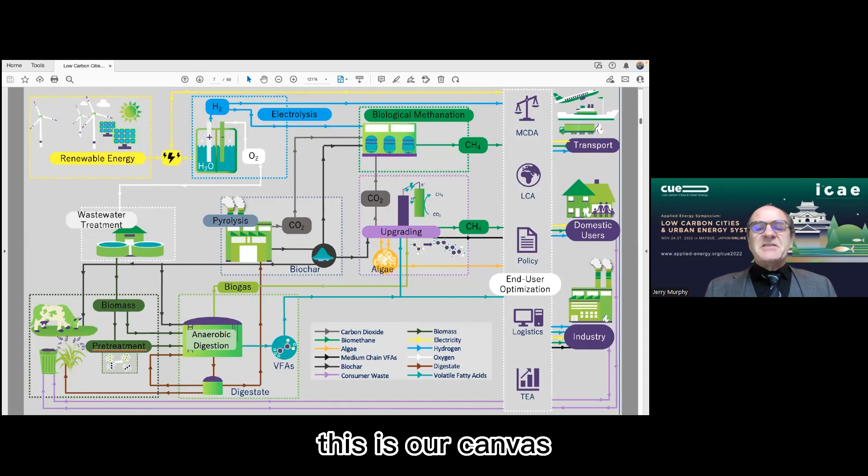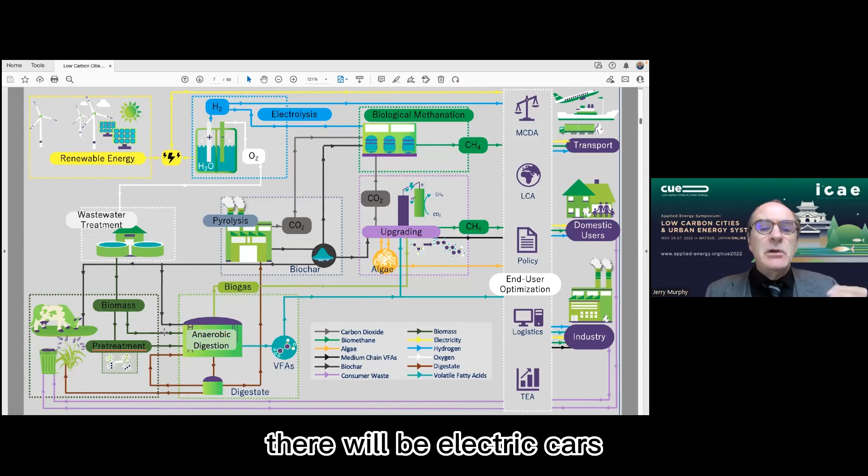It's always a collaborative process. This is our canvas, this is sort of where we take our inspiration, and there might be a lot in this, but I hope to go through the presentation and outline the areas of work that we feel are important to decarbonize society. One of the things we look at is the grand challenges of decarbonizing transport, industry, and agriculture. We take for granted that there will be electric cars, there will be renewable electricity, but we're trying to look at the difficult pieces.

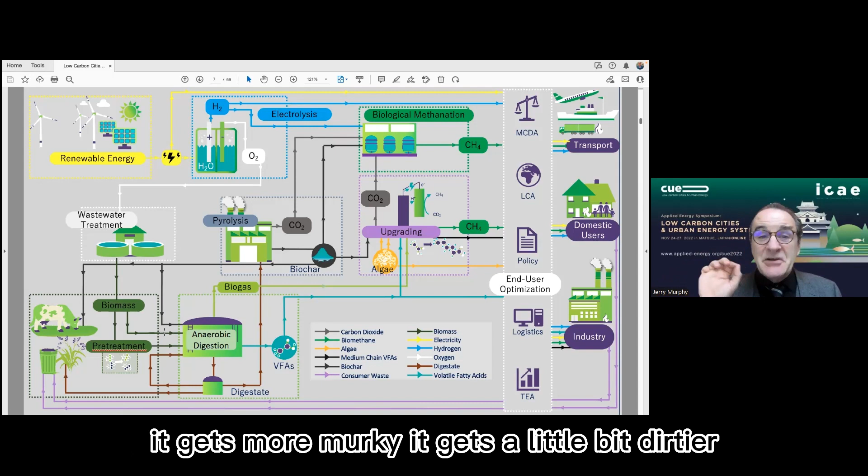A lot of what we look at is zero carbon. As an engineer, a mathematical engineer, I find zero very difficult. Whenever we look at things, we find it very, very difficult to get to zero. We can see large swathes of decarbonization, but zero always is difficult. As you get closer to zero, it gets more expensive, it gets more murky, it gets a little bit dirtier. So we look at difficult aspects of the decarbonization.

Typically we start with renewable energy, and we're very lucky in our center - we are the National Ocean Test Facility. We have 4 large wave tanks, and we can test devices at 1:10 scale, so a 1 meter wave becomes a 10 meter wave. We've tested lots of floating offshore wind devices and oscillating water columns.

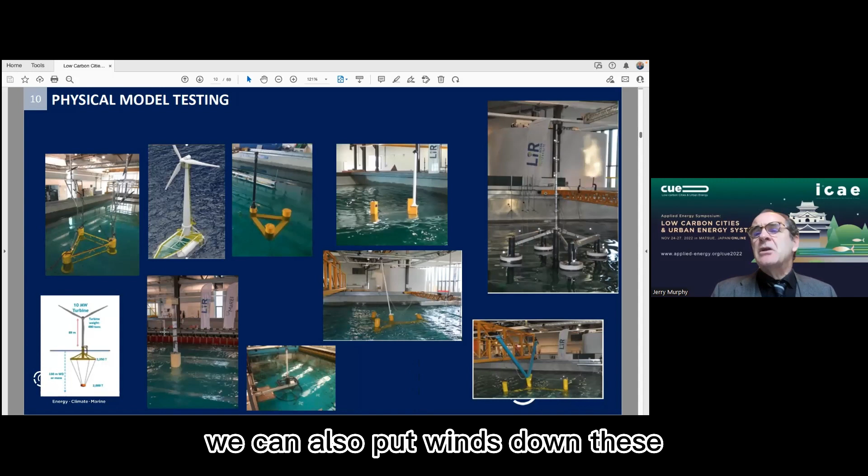We have circular tanks where waves can come in different directions, and we can measure at 1/100 of a second the movement of the devices in our facilities. So lots of different devices are tested, and it gives us lots of data. We can also put wind down these tanks to look at the effect of currents, of winds, of waves. This work is led by Jimmy Murphy, my good colleague.

So we use that data to look at how that energy is best used for society as a whole. And one of the areas, obviously, is hydrogen.

So the perspective we have is that Ireland is an island. If you're familiar with the geography, we have about 3,000 kilometers of coast. We have a population of about 6 million people. We sit off the northwest coast of Europe, with Britain between us and the mainland. But we have a huge resource of ocean. In terms of actual land under our authority, we're the biggest country in Europe. We've got this massive amount of ocean that is in our area.

The perspective we have is that we will keep building offshore wind until we satisfy electrical demand at the lowest level of capacity factor. For example, if Ireland has a requirement for 8 gigawatts of electricity, and we build 60 gigawatts, that will at all times cover the requirement for the country, even when it's not that windy. The idea is that the rest of the electricity could be converted to hydrogen. So we're looking at a hybrid model. Initially, we manage electricity, but afterwards we look at other things.

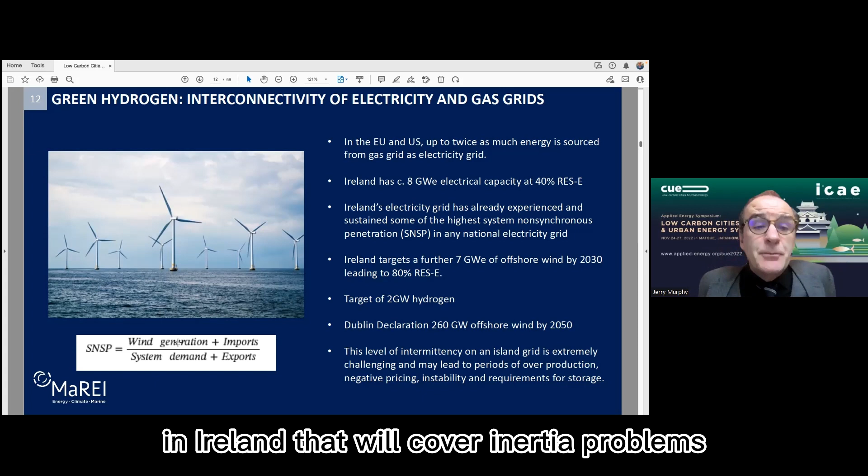Ireland has about 8 gigawatts of electrical capacity at the moment, and 40% of our electricity is covered by wind. An issue for Ireland is we are an island, so we have an islanded grid, not well connected with other countries. We've experienced the highest levels of system non-synchronous penetration of any electrical grid, going to 75%, meaning at any one time 75% of electricity is coming from a variable renewable source, which is wind generation. We've just spent 150 million on a flywheel in Ireland that will cover inertia problems. I'm not an electrical engineer, but full electrification is very, very challenging.

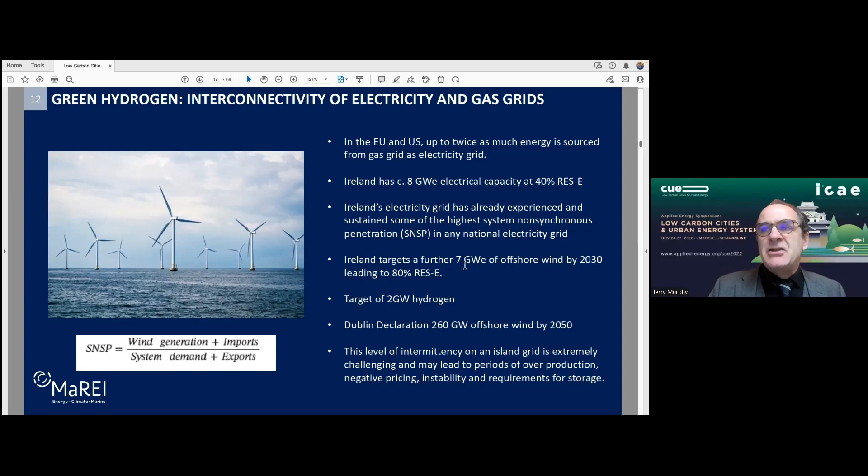Ireland has a target of 7 gigawatts of offshore wind by 2030, and a target of 2 gigawatts of hydrogen. We've signed the Dublin Declaration with our neighbours that in the northern seas of Europe there'll be 260 gigawatts of offshore wind. This is quite challenging. One reason is we've just signed a contract with France for a 700 megawatt HVDC cable to have some connection with France, at about €1 billion. So we're looking at very large HVDC cables coming ashore, and my understanding is the maximum size is 1 gigawatt. So we have a very challenging logistical problem in managing offshore wind to the level that we want.

If we look at curtailment and constraint, Ireland is an island, and we have about 5.5 gigawatts of wind, corresponding to 12% dispatch down. So we have to spill electricity either due to constraint or curtailment. Not all our electricity is actually used, because it's produced when, for example, on a summer night we're all in bed, it's windy, there's loads of electricity, and we don't use it.

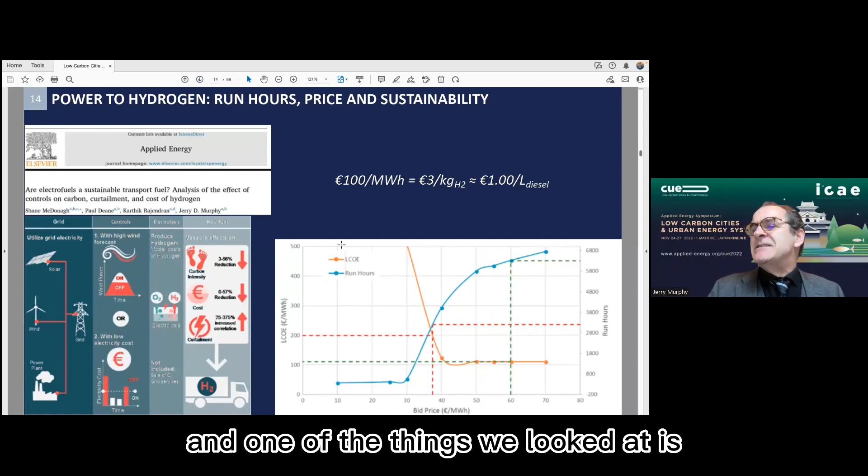So we've started looking at hydrogen as a way of capturing that electricity that isn't used. One of the things we looked at is if we had electrolyzers just for the curtailed electricity, just for 2 or 3 hours at nighttime. What would happen is we'd be running, if you follow the red line, about 3,000 hours a year.

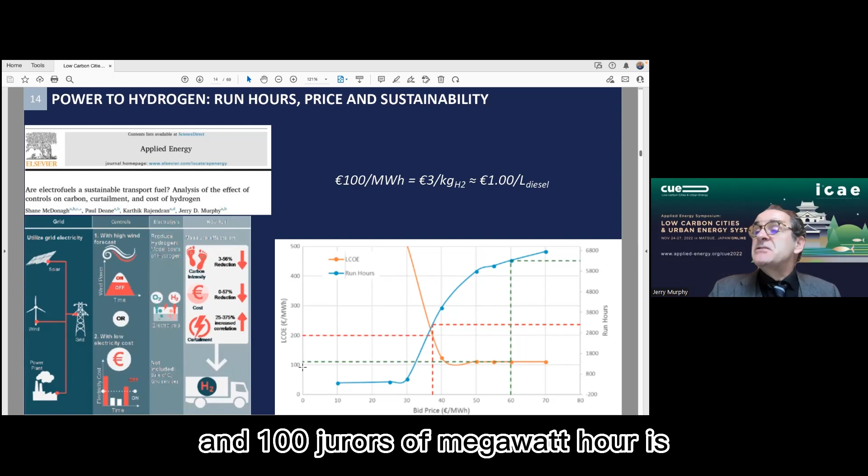The bid price would be about 4 cents a kilowatt hour, but the levelized cost of energy would be €200 a megawatt hour. However, if we ran for 6,000 hours a year, that would correspond to a bid price of about 6 cents a kilowatt hour, and our levelized cost of energy would be €100 a megawatt hour. So we need to sweat the assets. If we buy electrolyzers, they can't hang around for a few hours when we're curtailing electricity, they need to be operating a lot of the time. And €100 a megawatt hour is €3 a kilogram of hydrogen, about €1 per litre of diesel displaced.

So we're looking at this idea of offshore wind farms. Should they produce electricity? Should they produce hydrogen, or both? One of our papers looked at this: we would sell electricity until the demand fell. And when demand falls, we're satisfying the country's electrical demand and electricity becomes cheap. So through a model, we found roughly 4 cents a kilowatt hour is the crossover.

So we now produce hydrogen, and that would give a levelized cost of hydrogen of €3.77 a kilogram, which is 11 cents a kilowatt hour. So if we have electricity at 4 cents a kilowatt hour, we produce hydrogen at 11 cents a kilowatt hour.

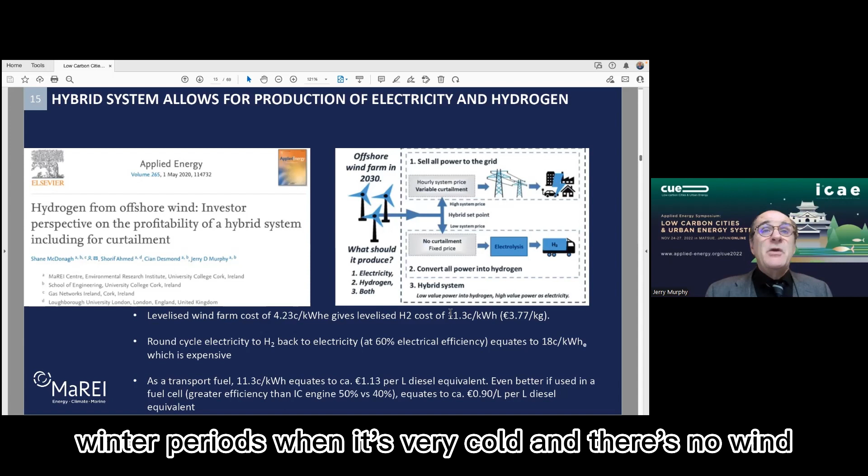There are conversations about storing hydrogen for 20 days underground so that we can manage those winter periods when it's very cold and there's no wind. But if we go from hydrogen back to electricity at 60% electrical efficiency, that's 18 cents a kilowatt hour. So there is a challenge: electricity produced at 4 cents a kilowatt hour, when you go to hydrogen and back to electricity, will be 18 cents a kilowatt hour. And that's the base cost - there'll be more transmission costs on top of that.

However, our utilities are looking at hydrogen as a means of dealing with peak electricity. However, if we look at transport fuel, that hydrogen at 11 cents a kilowatt hour is €1.13 per litre of diesel equivalent. And furthermore, if we put it into a fuel cell, which is higher efficiency than an internal combustion engine, it's about 90 cents per litre of diesel equivalent.

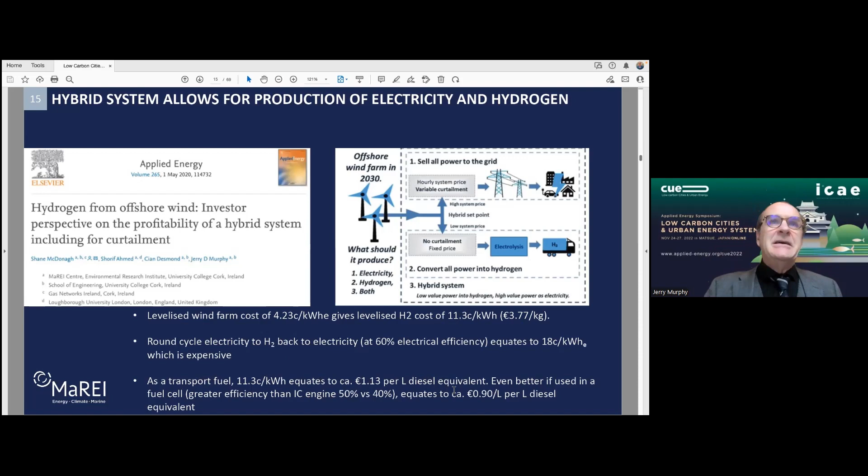So our perspective is hydrogen from offshore wind is very, very viable for transport. We've also looked at where do we put these electrolyzers. Are they on land? Are they on sea? Are they on every wind turbine? Is there a platform where the turbines connect to?

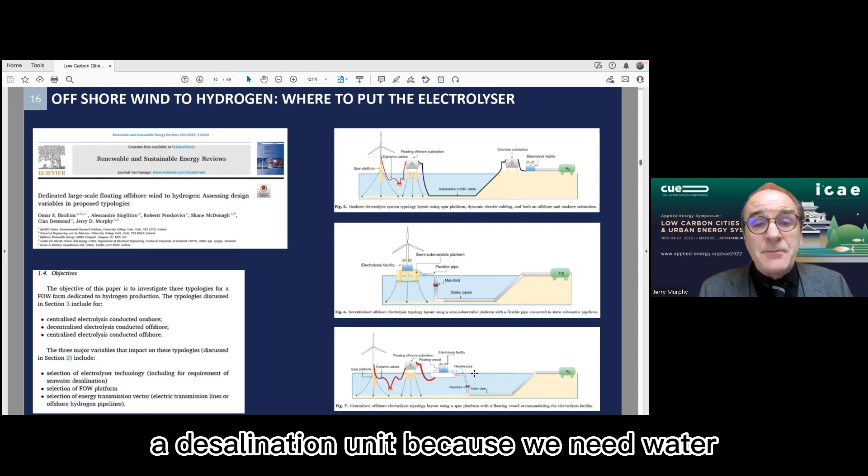We're looking at brine discharge, which brings in the whole area of the habitat and what will happen. But the joy of producing hydrogen offshore is that you can get a lot of power through a hydrogen pipe, where the HVDC cable is really limited to a gigawatt. So there are advantages and disadvantages of where the hydrogen is made.

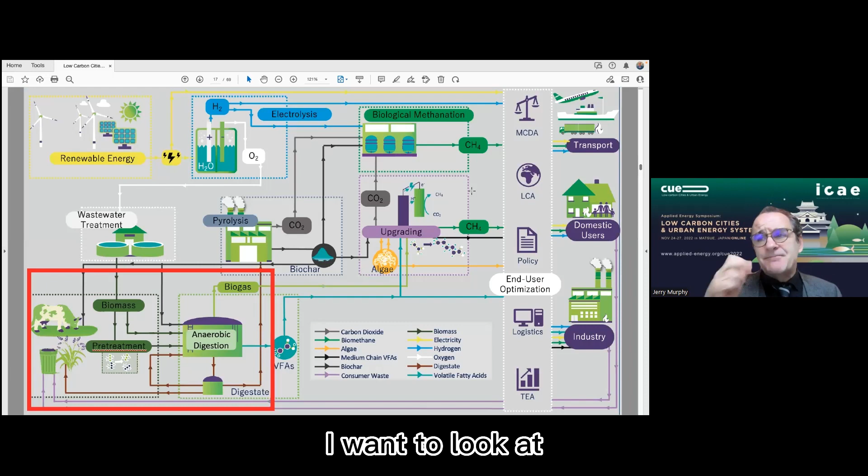I want to look at anaerobic digestion because this is very much part of the circular economy system. I served for 6 years as the leader of the International Energy Agency TCP in bioenergy, and we produced 14 or 15 reports and 20 or 30 case stories. But anaerobic digestion, in my perspective, is the epitome of the circular economy system.

It deals with food waste, with slurries. It can produce a transport fuel, combined heat and power. It reduces fugitive emissions from open slurry tanks.

For example, we looked at an organic farm in Denmark. When you go organic, you've no chemical fertilizer, no weed killer, and the yields of your crops decrease. So the biogas plant was built as a means of having an organic biofertilizer. All of their dung went to the digester, it was liquefied, and the minerals were far more available. So we made a fertilizer from dung that was better than dung. The yields went back up, and now the milk is assessed as greenhouse gas negative.

So again, we would see anaerobic digestion being essential for organic farms. One of our partners in Brazil had 400 hectares of grassland, and it was a nuisance what to do with the grass. Finally, they're now running 60 cars off that parkland grass.

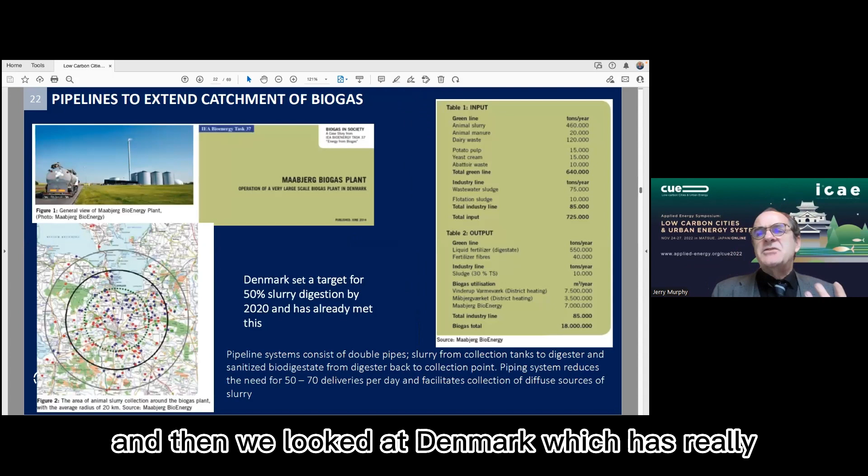And then we looked at Denmark, which has really gone for scale. One of the things they did in Denmark is back in 2010, they told farmers by 2020 you can't spread slurry on the land raw. They had problems with eutrophication, and problems with wells. So the government funded the farmers to have 6 months storage, and the farmers co-opted - very, very large digesters with a catchment of up to 20 kilometers.

So a farmer can take his or her dung to a pit, it's augured to the digester, which has an anchor tenant - this could be the food waste from a city, or the byproducts of a dairy industry. So all of these facilities happen at the digester, and then the digestate is augured back out to the farmer who's got a biofertilizer.

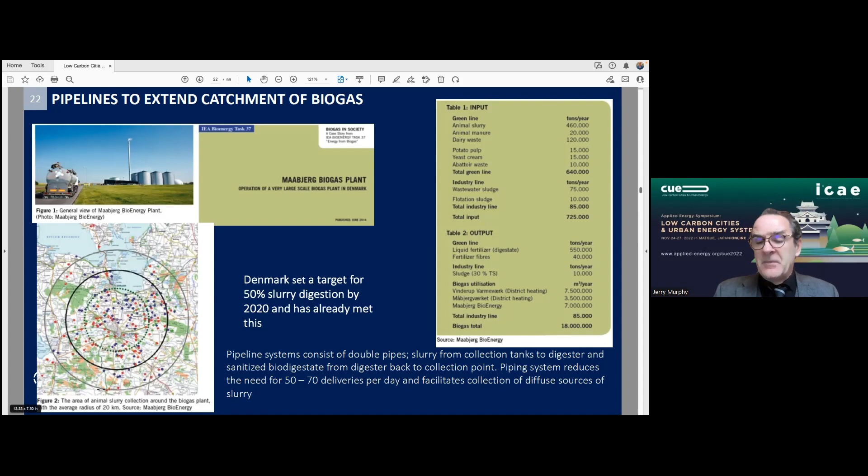We're also looking at multiple products from a digester. In Denmark, there is one biogas facility that puts methane into the gas grid, and the CO2 is scrubbed to be food scale or food level CO2. The demand for CO2 in hospitals, laboratories, and the food industry in Denmark is 65,000 tons, and a quarter of this is met by one large digester. So again, we have products such as CO2, biofertilizer, and biogas.

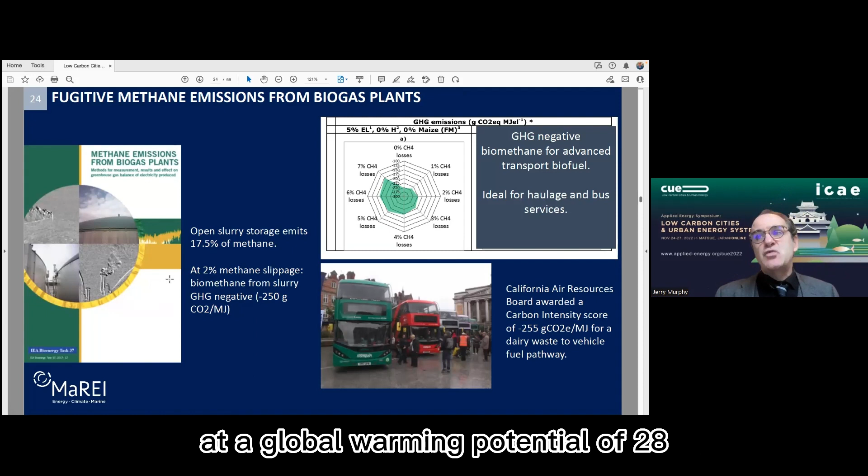What's quite important is that the open slurry tanks we have all over our countries emit methane to the atmosphere. If you have an open slurry tank, typically 17.5% goes up to the atmosphere at a global warming potential of 28. If you cover that tank and make it an anaerobic digester, you can limit slippage to 2%. In our report, we looked at 2% losses on a whole life cycle basis, and we'd be at minus 250 grams CO2 per megajoule. This corresponds with the California Air Resources Board, who awarded a carbon intensity of minus 255 grams CO2 per megajoule. So covering slurry pits and using the captured methane to power buses, which emit CO2 at 28 times lower global warming potential than methane, is a good thing. So we're in this circular economy, energy, environmental type system.

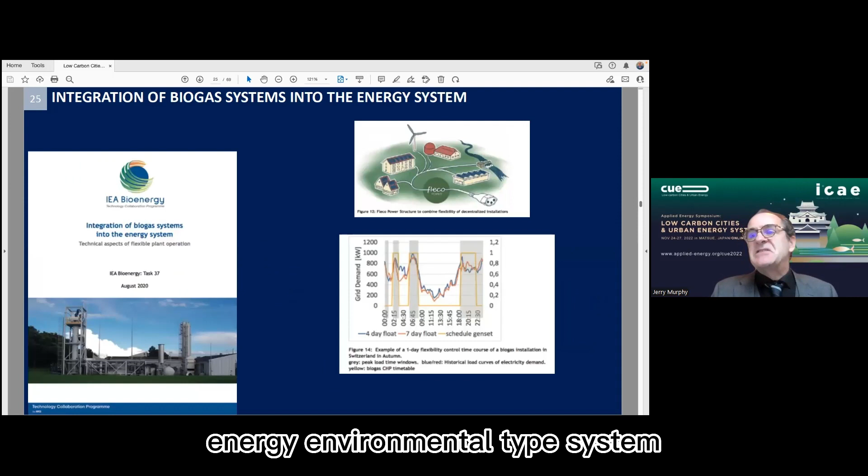We also looked at biogas as a means of working in a co-op. In Switzerland, a co-op has a hydroelectric scheme, a wind turbine, and biogas, and they sell electricity as a unit. The biogas allows them to be flexible. By night, they use biogas. When the wind isn't blowing, they use biogas. So biogas allows them to match the profile of how they sell their electricity in the market.

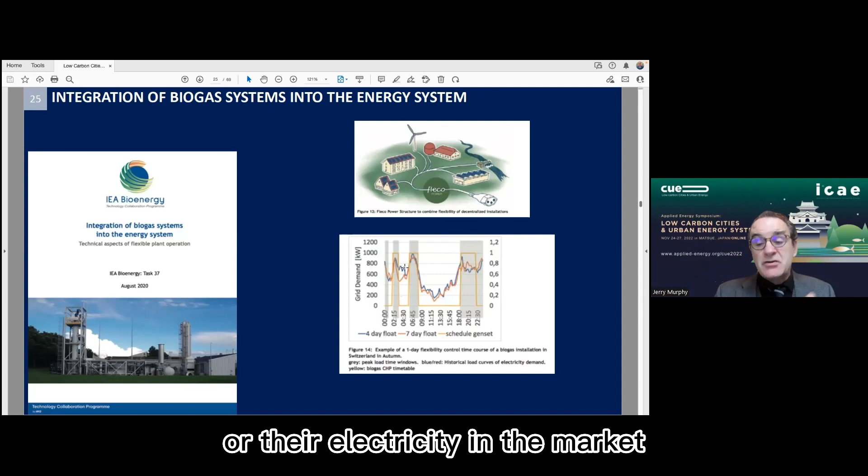I now want to move up to biological methanation. We've looked at hydrogen, and one of the things we're very interested in is power to X. We're interested in the hydrogen molecule rather than hydrogen gas, which is very voluminous. We want to look at pathways to go from hydrogen to methane to methanol to Fischer-Tropsch diesel. So we do see hydrogen as being a very important molecule, and one of the first steps is to methane.

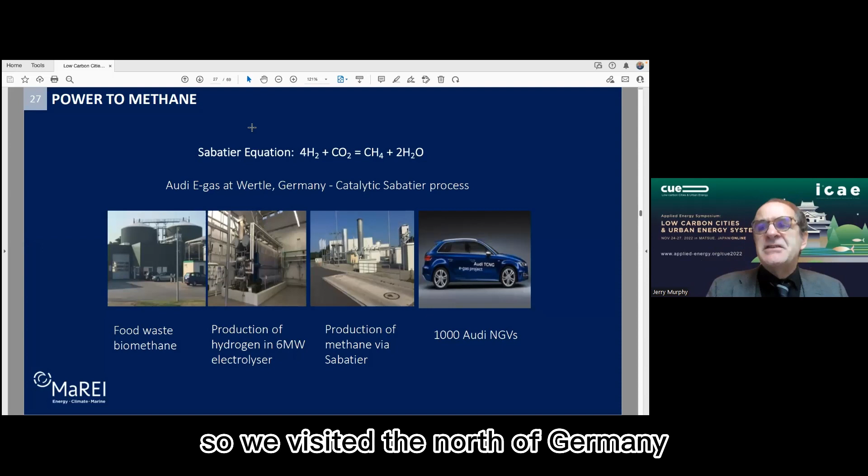We visited the north of Germany, Wertle, where Audi built a facility next to an anaerobic digester treating food waste. The methane goes to the gas grid and the CO2 is left behind, so we can capture that CO2. They built an electrolyzer of 6 megawatts, and they tell us they don't pay for electricity. When there is too much electricity, rather than asking a producer to go offline, they spill the electricity to this electrolyzer. The hydrogen is reacted with the carbon dioxide from the food waste to make synthetic methane - the Sabatier equation: 4 moles of hydrogen plus 1 mole of CO2 gives methane and water. So hydrogen from wind is reacted with CO2, a byproduct from the digester, to make methane, which is used to power 1,000 Audi natural gas vehicles.

It's a catalytic process. It operates at around 400 degrees Celsius, and there's a certain sensitivity.

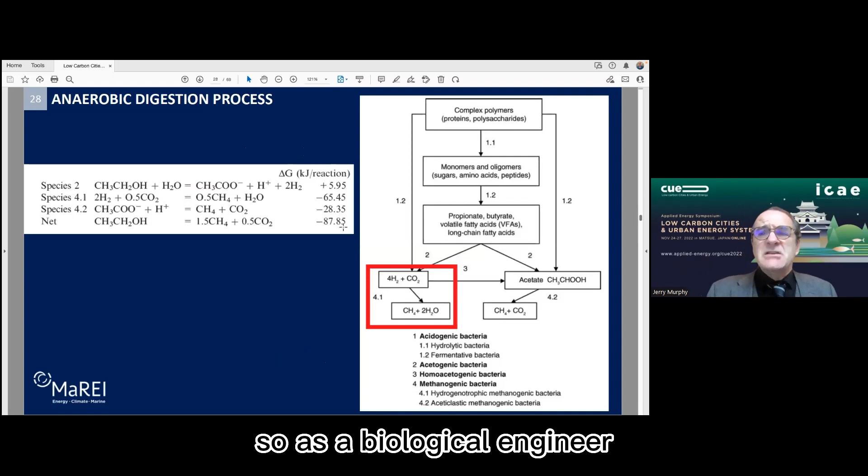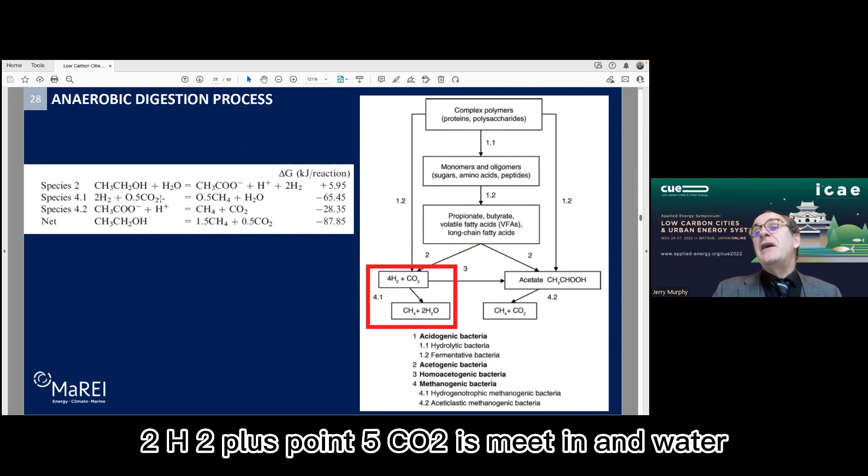As a biological engineer, we started looking at anaerobic digestion, which has complex polymers that are hydrolyzed to monomers, which are fermented to acids, which are then brought down to acetogenic bacteria that produce hydrogen and CO2. Then we have methanogenic archaea - 4.1 uses hydrogen and carbon dioxide to make methane and water. So we can see 2H2 plus 0.5 CO2 gives methane and water, and it's a very exothermic reaction. It's a lovely reaction. It will happen.

So rather than having a catalytic process, we could have a biological process. We added hydrogen and carbon dioxide to a batch of anaerobic broth and fed it over time, and all they got was hydrogen and carbon dioxide - no food, no substrates. We found Methanothermobacter wolfeii became dominant, and the reaction here is 4H2 plus CO2 gives methane and water. Performance was up about 95%, and we looked at mesophilic and thermophilic conditions, but it worked, and it worked quite readily. So then we started doing more things.

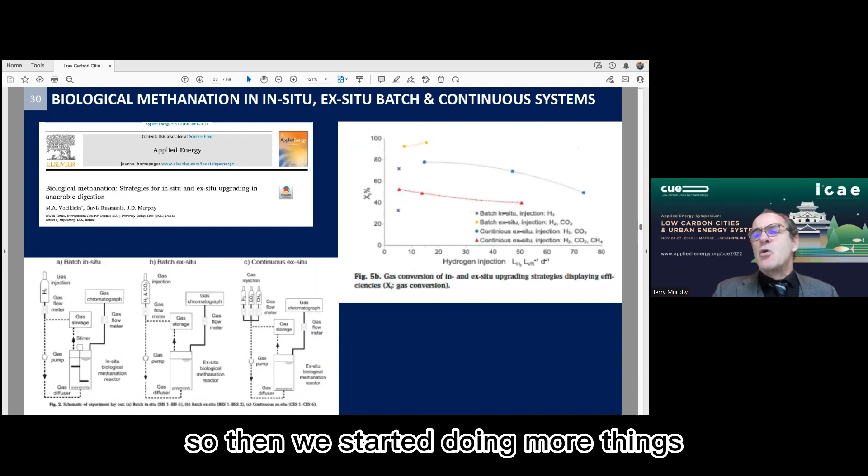We built a reactor and started operating it in different ways. First, we looked at in situ - if you put hydrogen into an anaerobic reactor, you're still going to have CO2, so that wasn't very successful; we were getting maybe 70% methane. We then looked at ex situ, where there's nothing else happening - we're only feeding hydrogen and carbon dioxide to the bugs - and we found we were up at 95%. Then we looked at a continuous process, a continuous ex situ system, where we're getting 80% efficiency.

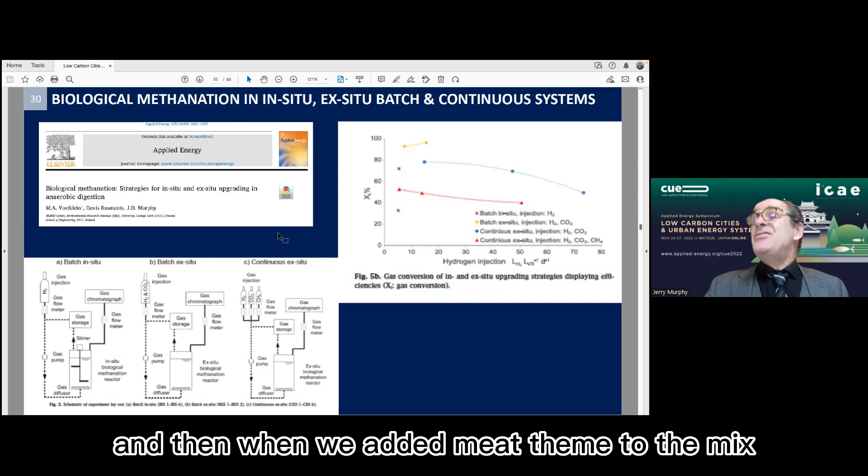But as the rate went up, it dropped off. And when we added methane to the mix, rather than just hydrogen and carbon dioxide, if we had hydrogen, carbon dioxide, and methane, the efficiency was lower because the partial pressures were upset.

So we came up with this idea of a sequencing bed system. Hydrogen and carbon dioxide or methane goes into a reactor. The hydrogen is recirculated because it doesn't go into solution readily. And then it goes to a second reactor, and then a third reactor.

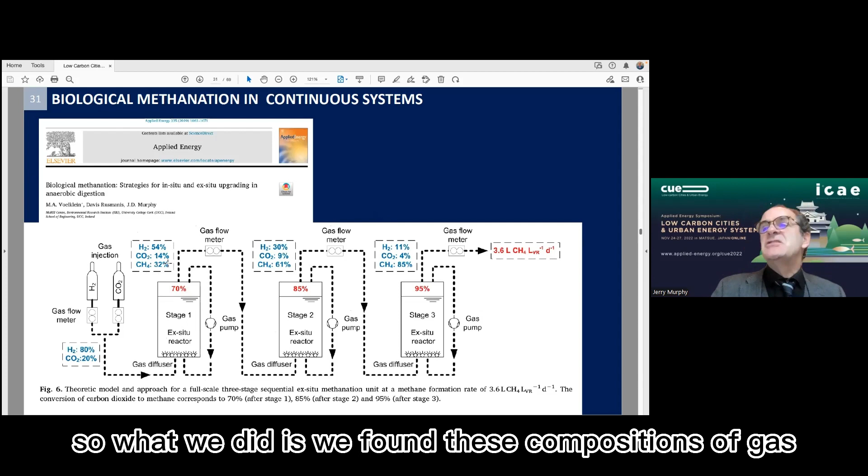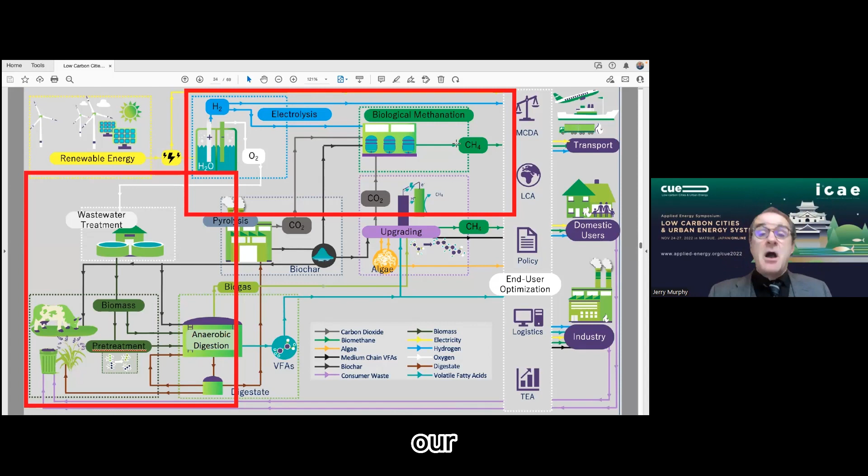So now we're looking at, we've looked at hydrogen from offshore wind, and we can convert it to methane biologically, or the Sabatier process as used by Audi. But we wanted to tie it together with anaerobic digestion. So we visited a facility in Denmark, and we published this within the IEA Bioenergy.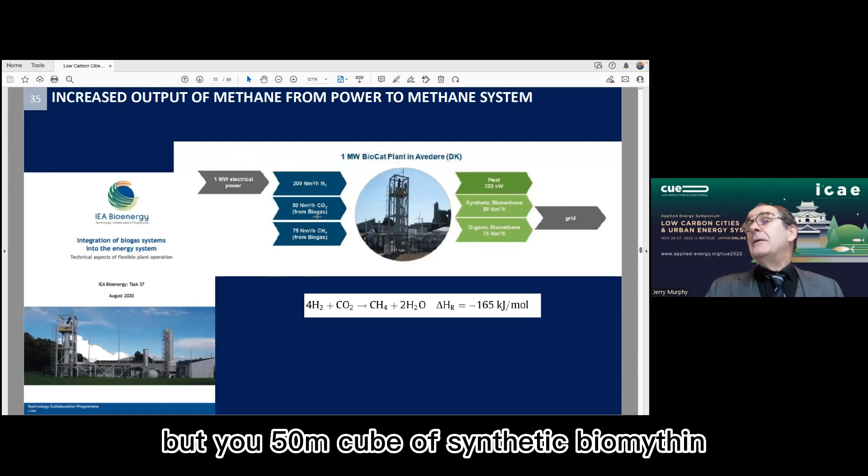They put an electrolyzer in a wastewater treatment plant. There was already a digester there, getting 125 meters cubed of biogas, of which 50 was CO2. At this biocat process, they added 4 times the CO2 as hydrogen, 200 meters cubed of hydrogen, which required a megawatt of electrical power, but all that CO2 became methane. So you now have your 75 meters cubed of biomethane, but you also have 50 meters cubed of synthetic biomethane.

And what this has done is upgraded the biogas. So we're replacing traditional biogas upgrading with an electrolyzer. We're passing methane, carbon dioxide, and hydrogen through a system, and out the other side we're getting methane and only methane. So we've increased our output by about 67%. So this is working.

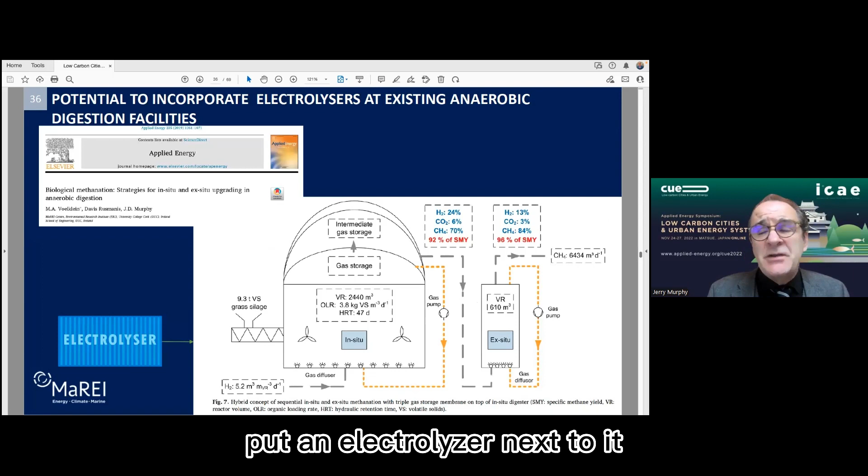We then looked at the fact that there are 12,000 anaerobic digesters in Germany alone. If every anaerobic digester put an electrolyzer next to it and had an ex situ biomethanation system, we could increase the output of all those digesters by 67%.

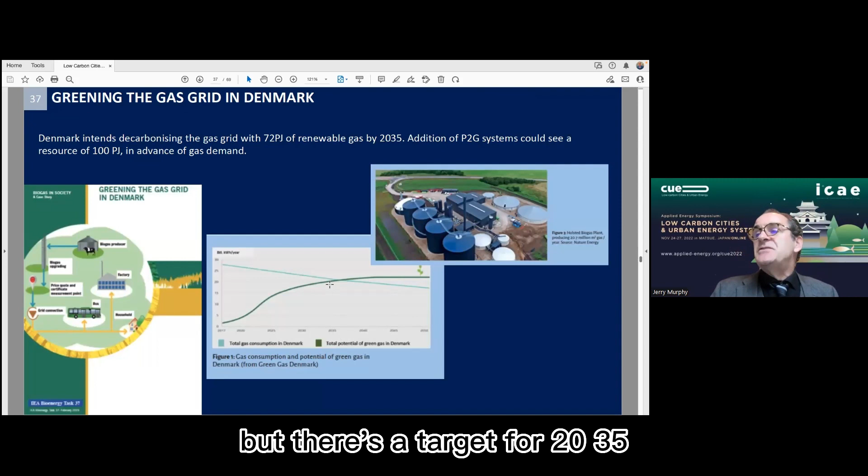In Denmark, at the moment, they have very large anaerobic digesters, and we work a little with Nature Energy, Ole Helvepund. In Denmark, currently 25% of natural gas is coming from biomethane on average over the year. In the summer they probably have a lot more, in the winter somewhat less. But there's a target for 2035 to replace all natural gas with biomethane.

And what would help in this is placing electrolyzers and ex situ biomethanation at every anaerobic digestion system, so they can access a very large resource. So it's viable, combining anaerobic digestion with power-to-X, that we can replace natural gas in the gas grid.

We looked at a situation in Ireland. I live in a city, Cork, and planning can be quite difficult. We have a wastewater treatment plant for 426,000 PE. So we thought, how about putting the electrolyzer at the wastewater treatment plant, where there won't be many issues, we hope, because very few people go to the wastewater treatment plant.

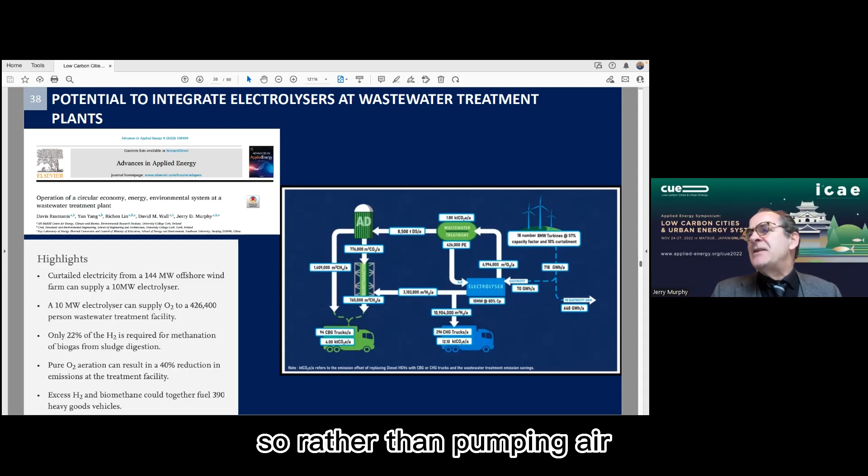And we looked at supplying the oxygen demand. So rather than pumping air, we would pump oxygen, and the oxygen would come from the electrolyzer, which in essence is reducing the pumping by a factor of 5. So we're decarbonizing the wastewater treatment plant.

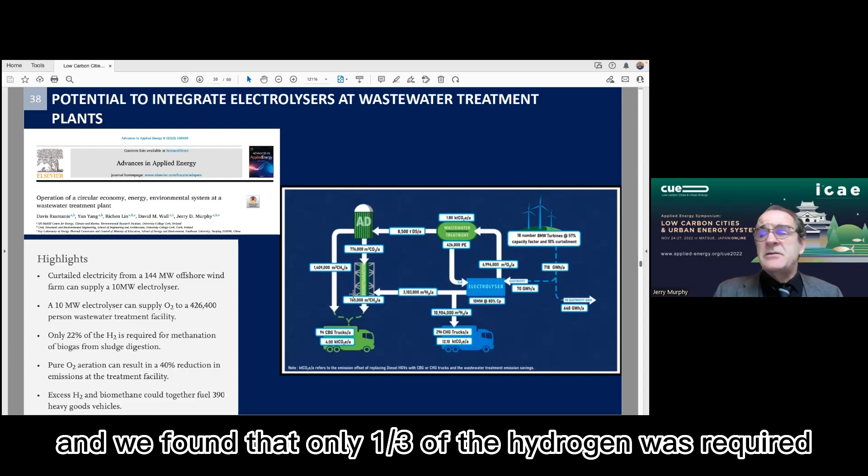So we published this in Advances in Applied Energy, and we found we could power 400 heavy goods vehicles, decarbonize the wastewater treatment plant, and capture the curtailed electricity from 18 8-megawatt turbines. So it was a nice bespoke application for our own city.

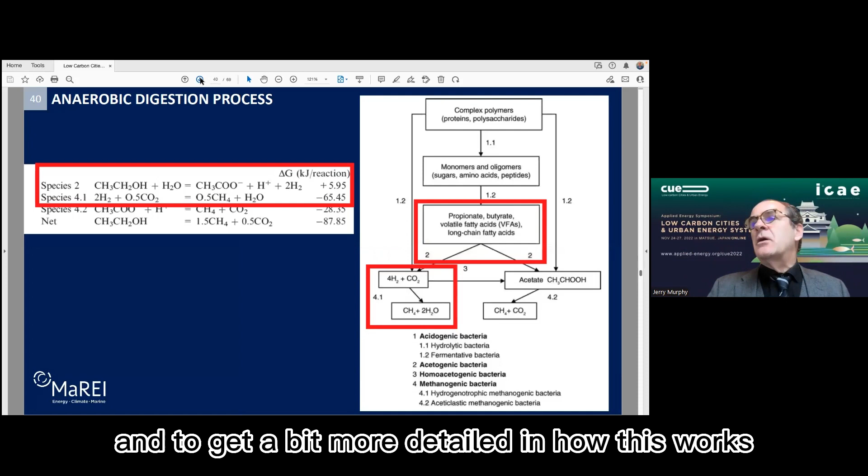We then wanted to look back at anaerobic digestion and get a bit more detailed in how this works. So again, if we look at the flow chart, one of the things in the anaerobic digestion process is that the acetogenic bacteria, if we break down ethanol by acetogenic bacteria to acetate and hydrogen, the standard free energy is positive, which means it's not likely to occur.

So this reaction from the acetogenic bacteria only works in the presence of the hydrogenotrophic methanogenic archaea. So we're back to our guy here who converts hydrogen and carbon dioxide to methane and water, which is very favorable. So there's a syntrophic mutualism between this bacteria and this archaea.

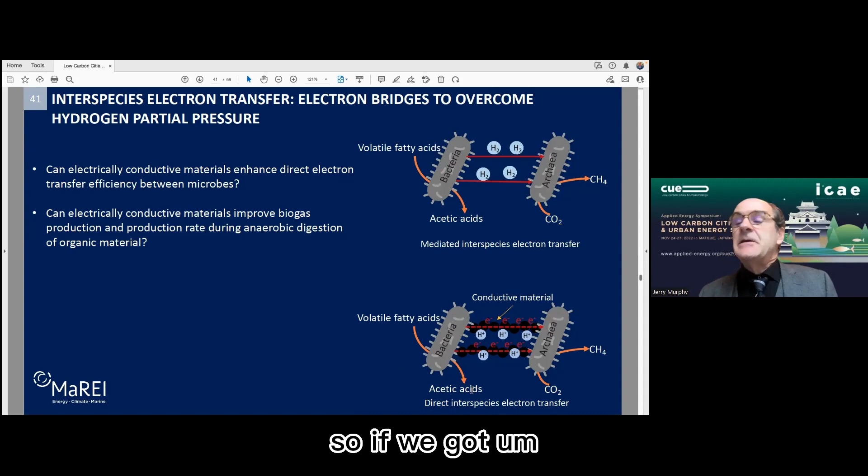So what we started looking at is how do we make this reaction better. We have this mediated interspecies electron transfer, which is this reaction. What we proposed was a direct interspecies electron transfer. So if we got conductive material and formed a little electron bridge, by adding conductive material, we could have hydrogen ions popping across and make the reaction more favorable.

This is a paper we published in the Chemical Engineering Journal, where we looked at mediated interspecies electron transfer with a positive standard free energy. But when we added graphene, we could form this electron bridge. The reaction occurred a lot faster, and we can see that the standard free energy is minus 150.

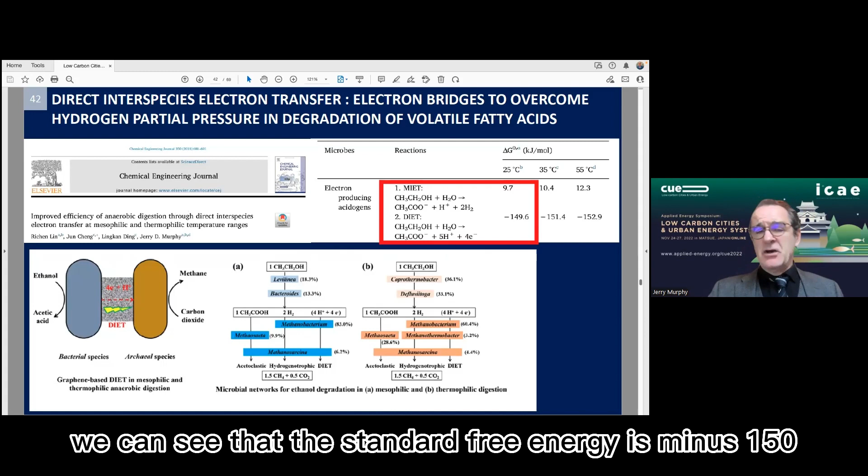We looked then at a stillage reactor that was under stress. It wasn't working well, and when we added graphene, it stabilized the whole system. So we're seeing the benefit of adding conductive material. However, graphene is very, very expensive. It's seen as a wonderful element that does great things.

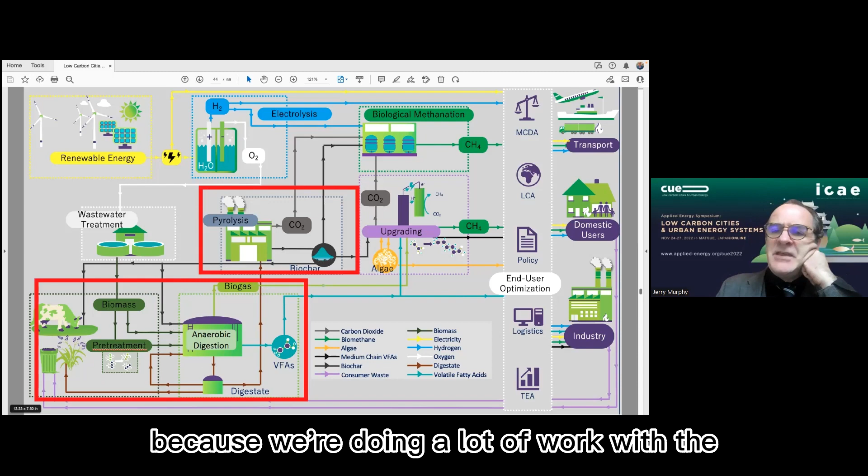So we started looking at pyrochar. We introduced the concept of pyrolysis. This was quite serendipitous because we're doing a lot of work with the brewing industry and the distilling industry, and we're looking at really large distilleries requiring really large digesters, requiring massive land spread areas for the digestate. So if we separated digestate into solid and liquid and pyrolyzed the solid element, we would get more gas, we would get pyro oil, but we'd also get pyrochar or biochar.

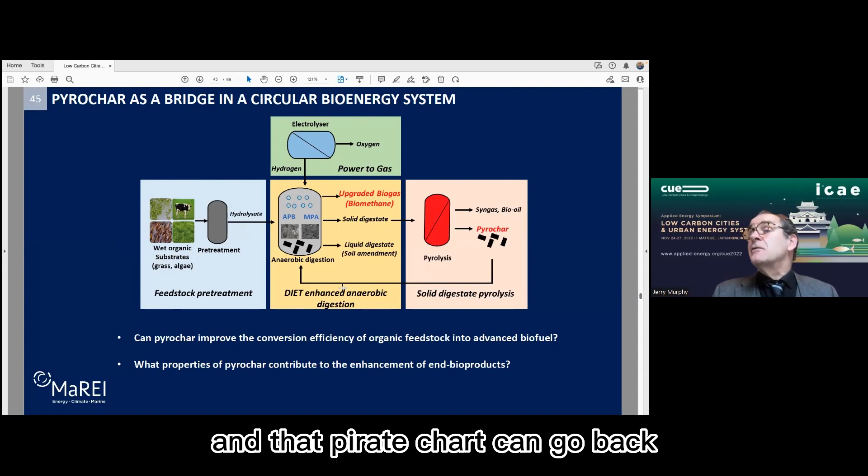So we're now looking at this type of system where we have organic substrates being pre-treated into an anaerobic reactor. We have power to gas giving us hydrogen to upgrade the biogas. We're taking our digestate to pyrolysis, making a pyrochar, and that pyrochar can go back into the anaerobic reactor to make it work better, to stabilize it, to increase the production of methane. And the pyrochar would eventually go back to land.

It's almost pure carbon, so it's a soil organic content enhancer, which is deemed a negative emission technology. So we would be reducing the greenhouse gas in the agricultural process by increasing the carbon in the soil and increasing photosynthesis.

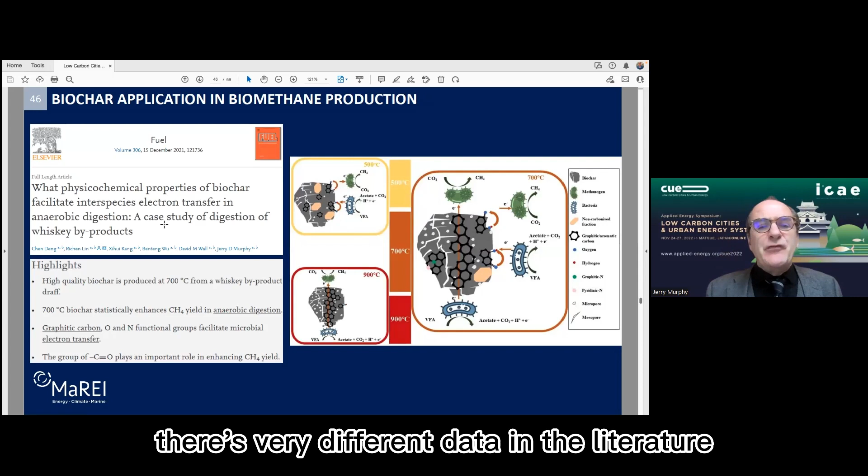So we started looking at pyrochar, and what we found was there's very different data in the literature. Some people say it works, some people say it doesn't work, but it depends on what the pyrochar is made from. Is it from wood? Is it from draff? Is it from straw? Is it from digestate? What temperature is it made at?

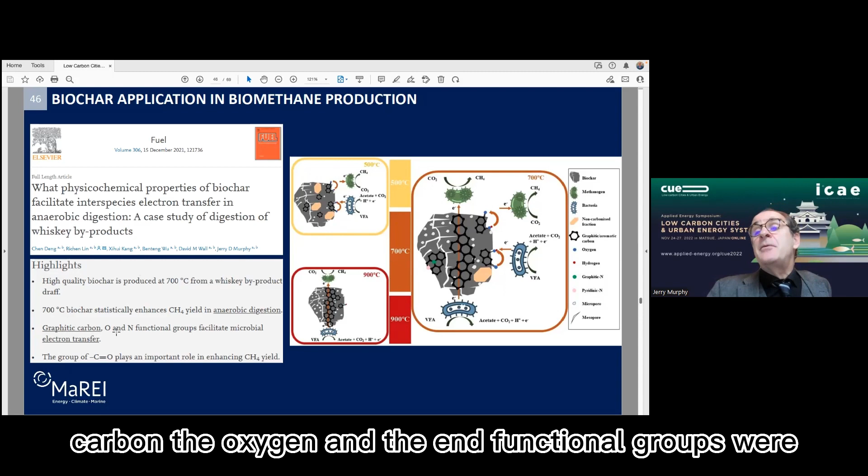So we do a lot of work with the distilleries in Ireland and in Europe. We looked at draff, which is a solid byproduct from producing whiskey, and we heated it to various temperature ranges, but we found 700 degrees Celsius gave us the best results. And the graphitic carbon, the oxygen, and the nitrogen functional groups were very, very important in this process.

So then we went back to the ocean. Cork is a coastal city. We have lots of beaches, we have lots of seaweed, and there's been lots of conversations about seaweed as a source of biorefinery and biofuels. So we looked here at Laminaria digitata, where I live. This is only 500 meters from where I live. That's where I get my laminaria.

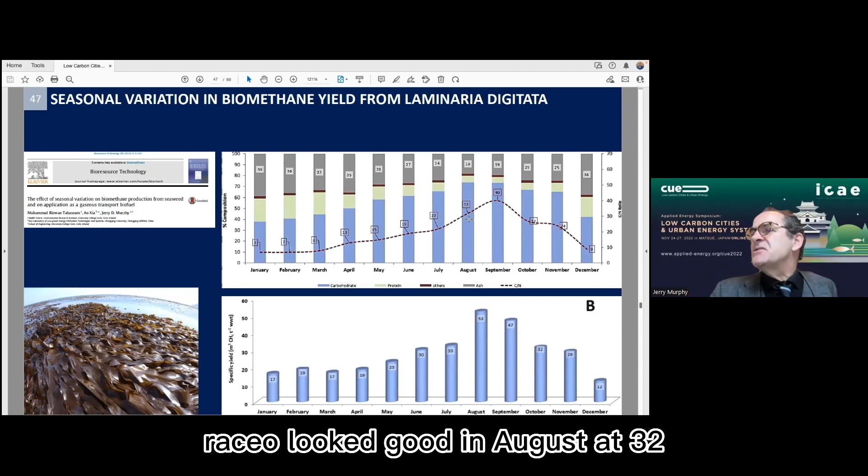We brought it in January, February, March, April, May, June, July, and we looked at the carbohydrate content, the protein content, and the salt content. We found the seaweed ripens around August, September, and the carbon to nitrogen ratio looked good in August at 32. And when we did biomethane potential assays, we found August gave us the best results, around 53 meters cubed of methane per ton of Laminaria digitata.

But we never got the theoretical methane production. There was always an inefficiency. It was also difficult because there's a lot of salt in seaweed, and the carbohydrates are different. We have arabinose. So if you have a digester that's used to food waste or slurry, and you feed it seaweed with salt and arabinose, it's difficult.

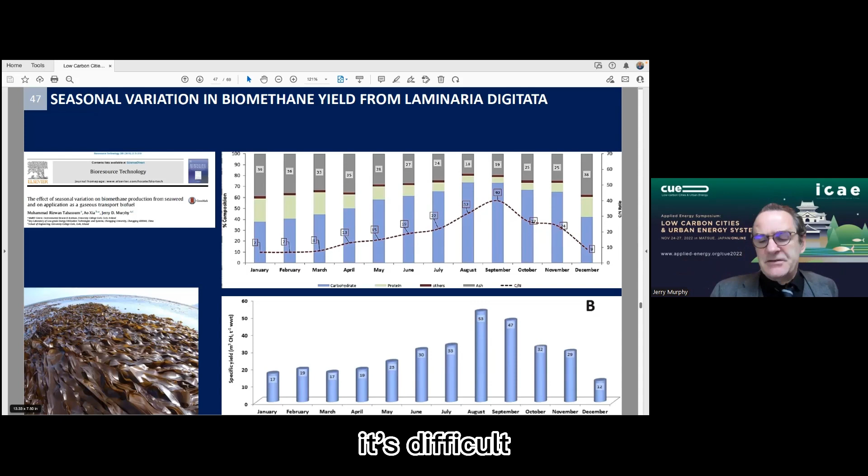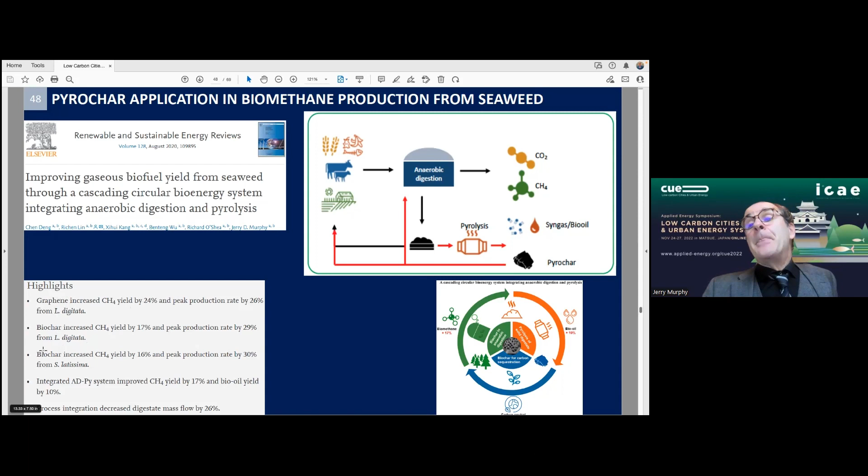But we did look at anaerobic digestion of Laminaria digitata and Saccharina latissima, which is a sugar kelp and a common kelp. We looked at the idea of feeding the digester, adding pyrochar into the anaerobic digester, and we compared it with graphene. So we know graphene works very, very well, but it's expensive. Graphene increased the yield of methane by 24% for Laminaria digitata. Biochar did 17%, so we were getting something almost as good as the graphene, but it was a lot cheaper.

So it sort of reinforced our idea of this circular economy of digesting byproducts and pyrolyzing those byproducts to make a pyrochar.

If we go back to seaweed, one of the things we found was our anaerobic bugs weren't all that happy, and it took them a long time. So we looked at a two-phase system: a hydrolytic reactor at a pH of about 5, a 4-day retention time, very high organic loading rate to make volatile fatty acids. Those volatile fatty acids, such as acetic acid and butyric acid, would be fed to a methanation reactor, and those guys would be very happy because they're used to acetic acid.

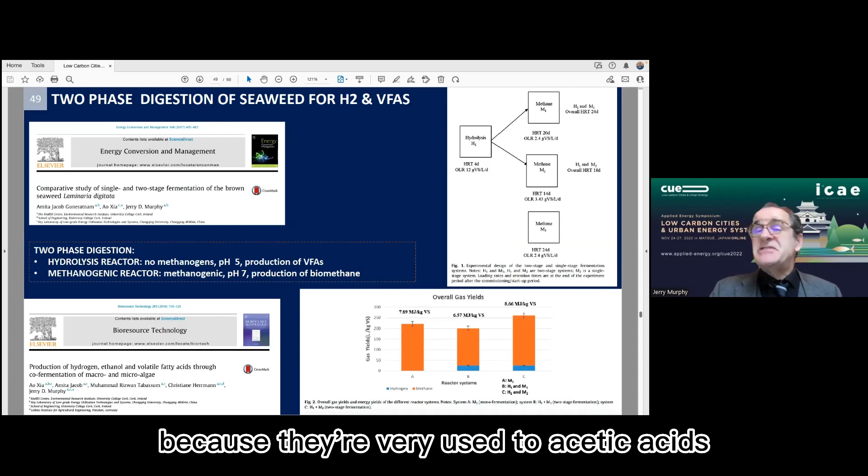This guy down here, M3, got the seaweed as is, with a 24-day retention time. What we found interesting is that this monodigestion of seaweed in the single reactor gave us 7.9 megajoules of gas per kilogram of volatile solid at a 24-day retention time.

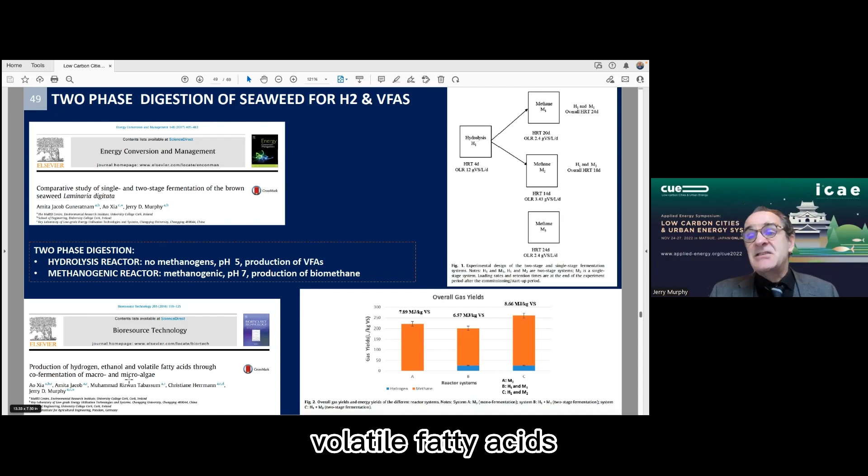However, if we look at H1 and M2, it was a combined 18-day retention time, and we got more energy because the methanogens were very happy with the volatile fatty acids. We also found we could make lovely volatile fatty acids. So rather than going to biogas, we could make volatile fatty acids, hydrogen, ethanol, which would have higher economic value.

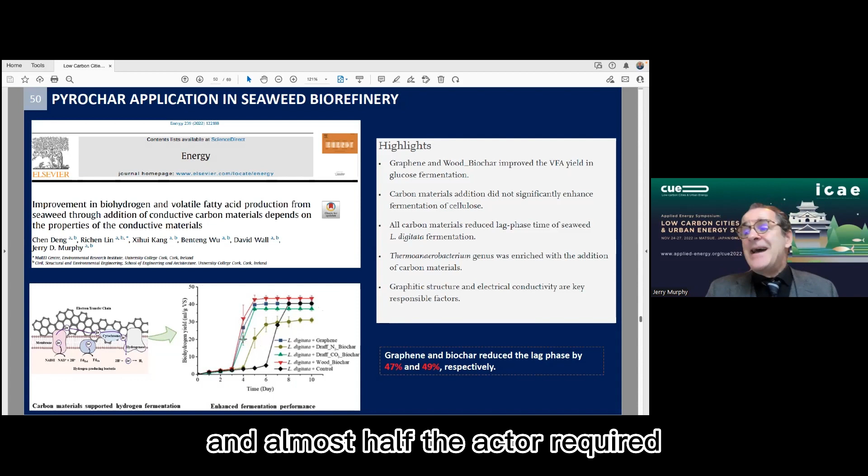So what we looked at then was, if we had only this hydrolysis reactor, and we added pyrochar in that reactor, we could push the reaction over here. This red guy is laminaria digitata and wood biochar, and the black is the control. So we could increase the rate of production of the volatile fatty acids, with almost half the reactor required and the retention time needed to make our volatile fatty acids.

So now we're wanting to look at pyrolysis and biological methanation. When we added hydrogen and carbon dioxide to reactors to make methane and water, it works quite well, as we have seen. However, when the system is turned on and off intermittently, which we would expect depending on surplus electricity, it became unstable and unsettled. By adding graphene, we were able to recover the conversion efficiency, and the process worked better.

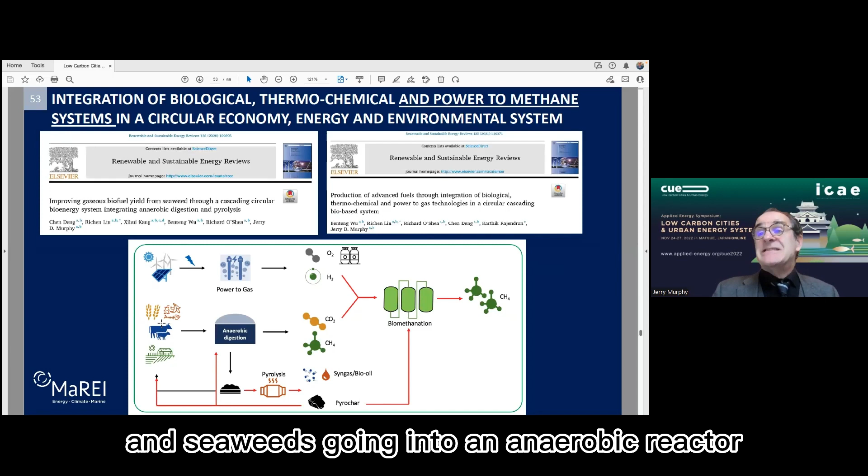This brought us to the idea of this whole integrated system: food waste, slurries and seaweeds going into an anaerobic reactor, producing digestate. The digestate is pyrolyzed for syngas, bio-oil and pyrochar. Our offshore wind goes to power to gas, we produce hydrogen, and oxygen is used, hopefully, maybe in a wastewater treatment plant. The hydrogen reacts with the biogas to give us pure methane. If this is intermittent, our pyrochar will make the biomethanation more stable, and then the pyrochar goes back onto land as a negative emission technology. So we see lots of little loops in the system, which are all good for decarbonization.

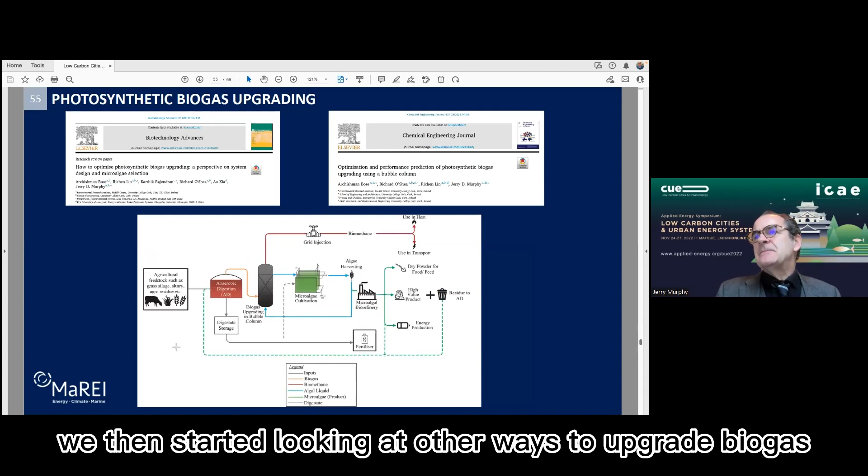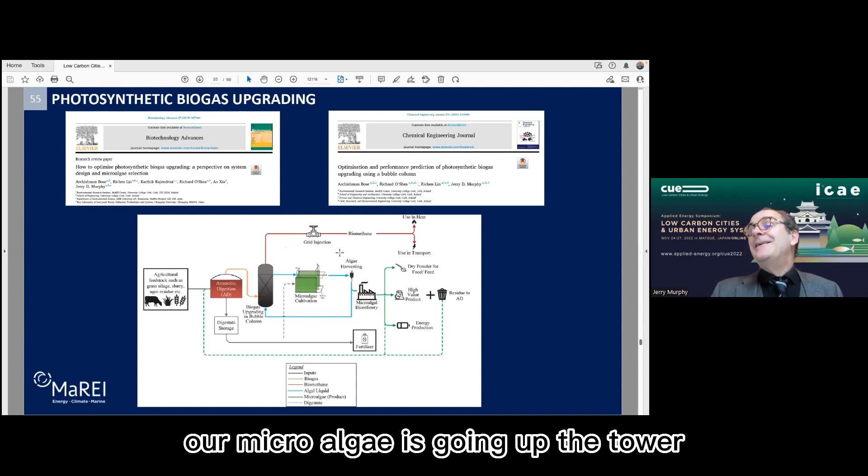We then started looking at other ways to upgrade biogas, and we started looking at microalgae — photosynthetic biogas upgrading. Our biogas from the anaerobic digestion would go into a column, a carbonate-bicarbonate cycle, and the CO2 would become bicarbonate. We would also have microalgae going up that reactor, and they would use the bicarbonate for production. The microalgae would convert the bicarbonate to carbonate, which goes back into the tower. So in essence, our biogas is going up the tower, our microalgae is going up the tower, and we're producing microalgae.

That microalgae can be used for many things. I've been in China with my colleagues in Zhejiang, and they were selling compressed microalgae as a food supplement at high value — it's a vegan food. So we're now looking at producing biogas, biofertilizer, and food.

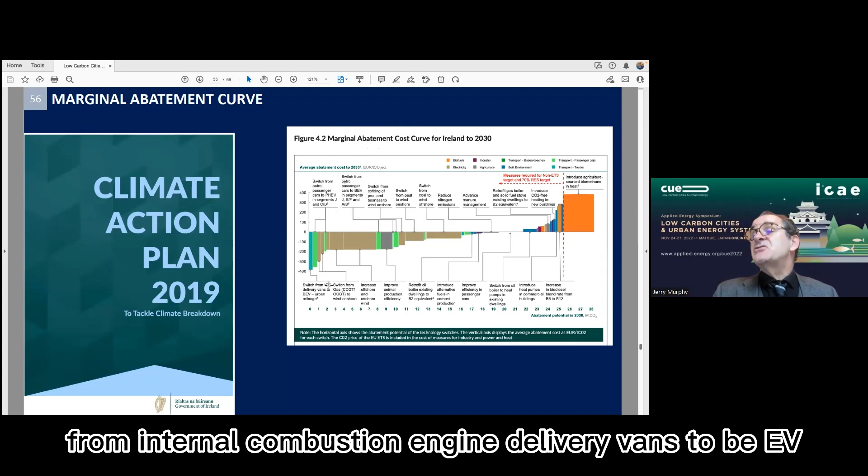An issue we have with policymakers is they're not technologists. The Irish government had a climate action plan, and they looked at the marginal abatement cost curve, developed I think by McKinsey. It's used across the world to decide the best spending of money per ton of carbon. For example, down here, if you're beneath the line, if you're negative, it means it's really good — a negative marginal abatement cost means you're making money by doing this decarbonization. So switching from internal combustion engine delivery vans to BEV was seen as really, really good.

The width of the line is the resource. Now, if you go out across this line, you'll find an orange box, and the marginal abatement cost curve was over 300 euros a ton — it's agricultural biomethane. We were very depressed and not happy with this result, because there are so many applications of anaerobic digestion, yet the government says the marginal abatement cost curve of biogas is above the line, 350 euros a ton, and we're not doing it because we have plenty other resources.

So if we go back to our microalgae producing biomethane, food and biofertilizer, now there are many scenarios.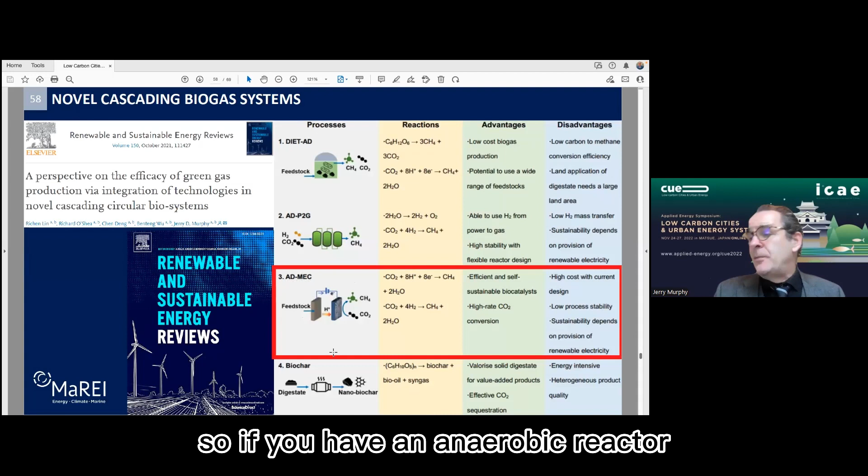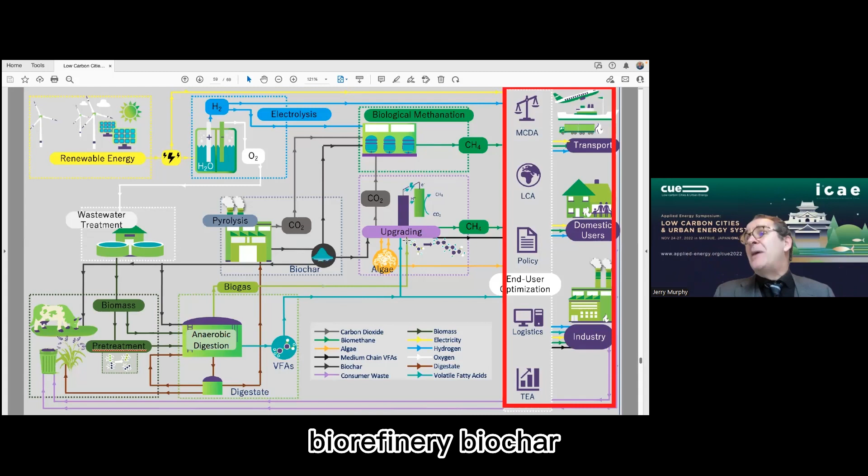We then started looking at microbial electrolysis cells. If you have an anaerobic reactor and you put electrodes into that reactor with maybe 1 volt currency, at the biocathode, CO2 converts to methane. So it's almost like an upgrading system. Again, this is as of yet unpublished. If we put a 1 electron current into a biocathode, we get 6 times the energy back as the electricity that went in. So the electricity is a catalyst. It causes reactions to occur. It converts CO2 to methane. So by putting the electrode in and putting electricity in, we get 6 times the return of the electricity that went in. So we have this system of upgrading, microalgae, biorefinery, biochar. Our system is varied, and we offer solutions rather than definitive pathways.

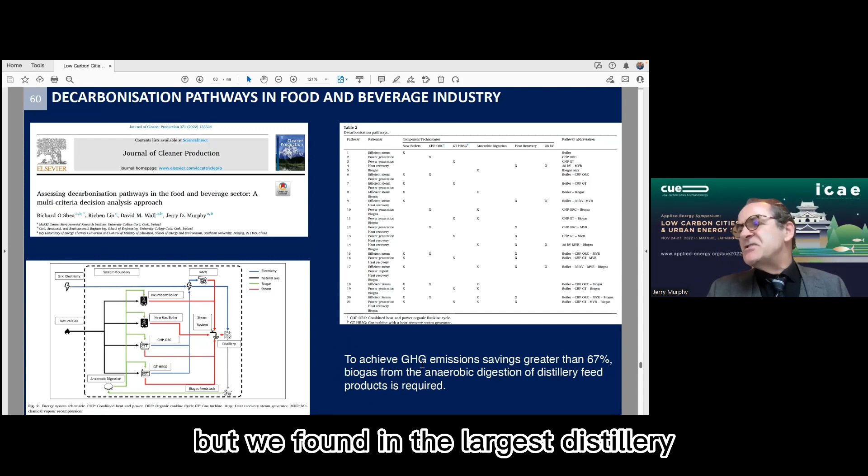We then started looking at industry and haulage and how all this could be used for the benefit of society. We looked at a distillery which is very nearby, and we found there are many ways to decarbonize, but we found the best solution was number 20, which included anaerobic digestion. We're now working with 9 distilleries across the planet. In the largest distillery, we could have cheap decarbonization, but we couldn't get beyond 67% unless we had digestion of the byproducts. With reference to the last presentation, biogas can be used in scope 3 in bringing trucks into the distillery. The digestate from the biogas can be used as scope 3 as a fertilizer for the grain that makes the whiskey, or the biogas can be used in scope 1 by replacing the natural gas on the system.

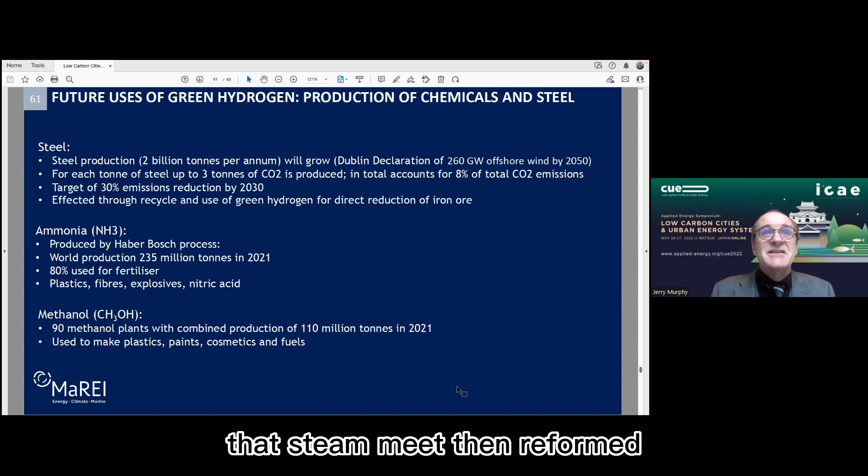So we found going from biogas to methanol was very easy. CH4 is biogas, CH3OH is methanol. So we can go from biogas to methanol in a process, but we won't get full conversion because of the stoichiometric ratios. We need to bring in hydrogen from an electrolyzer. We can reform the methane to carbon monoxide, and carbon monoxide and hydrogen gives us methanol. So methanol is a very easy step from methane.

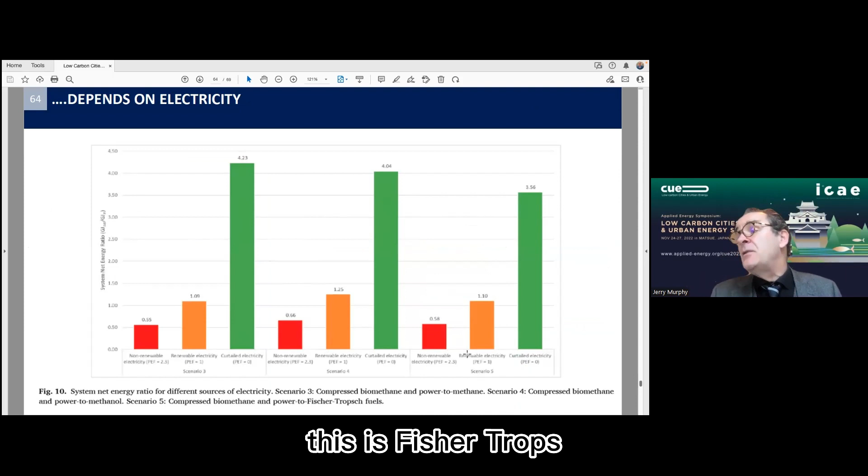And we found we could go to Fischer-Tropsch diesel, and we looked at the energy balances, and we found that if the electricity is surplus, we can get a 4-fold return - this first one here is methane, this is methanol, this is Fischer-Tropsch. However, if it's from offshore wind and the primary energy factor is 1, we're getting a 9% return, or a 25% return, or a 10% return. So it's not that good.

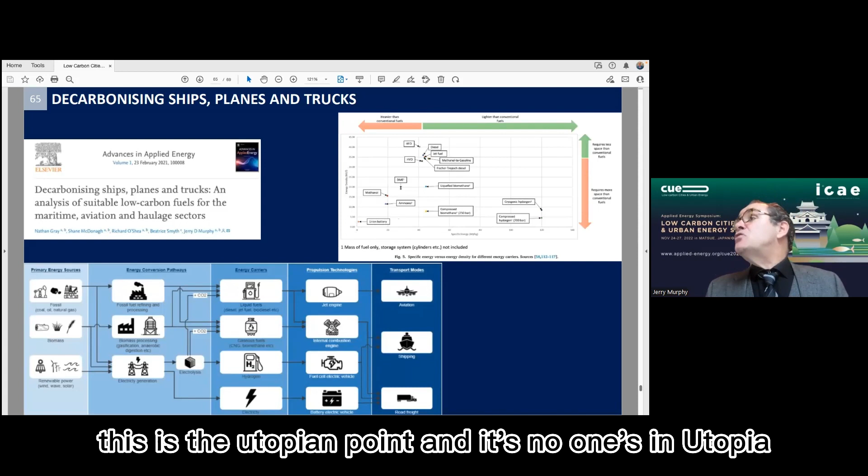But again, we have published in Advances in Applied Energy, and we looked at ships, trucks, and planes. This is the nadir - you're heavy and you require lots of space. This is where lithium-ion battery sits. You're not going to have a battery plane taking you to Dubai from London. This is the utopian point, and no one's in utopia. But we looked at jet fuel, and the best fuels would be methanol to gasoline or Fischer-Tropsch diesel. So even though these have a bad energy balance, it's probably the only way of flying planes and ships.

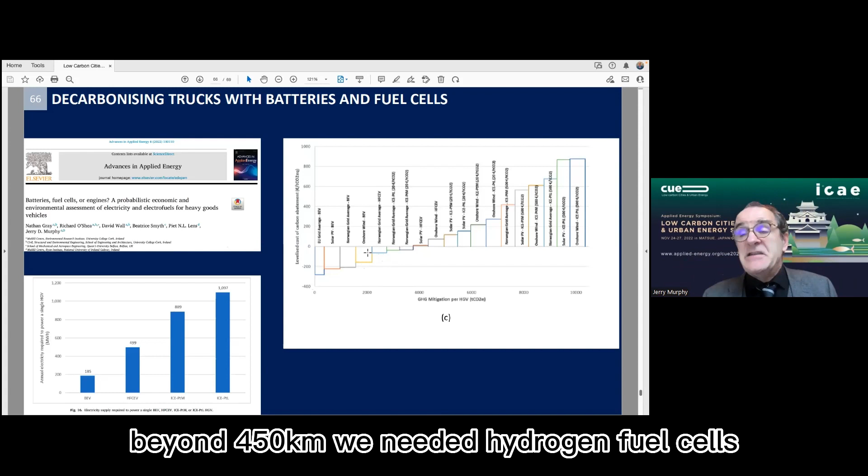We need these electrofuels. We then looked at trucks, published in Advances in Applied Energy, and looked at trucks running on electricity below 450 kilometers, where the marginal abatement cost was really, really good, depending on the source of electricity. Beyond 450 kilometers, we needed hydrogen fuel cells, but we found that power to liquids did not work - they were too expensive. What we also found of interest is the electricity used by one truck, a BEV, is 185 megawatt hours, but for a fuel cell it's roughly 500. So a battery is best.

Hydrogen is next best. And beyond that, for shipping, for trucks, for boats, we then need methanol and we need ammonia. In one of our present papers that we're working on, we reckon ammonia is the best choice. We're looking at a ship coming from Shanghai to Rotterdam.

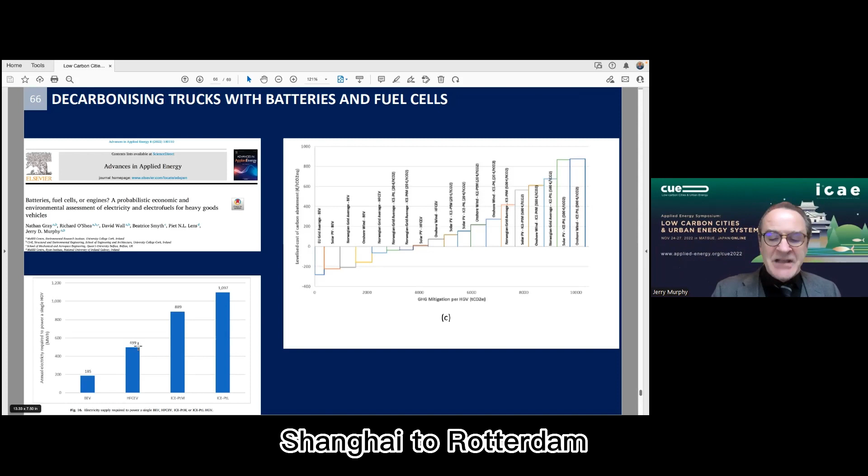We're looking at the total cost of ownership, but methanol seems to be the way forward. The perspective of our colleagues in the marine industry is they won't do ammonia, because if there's a crash, ammonia will form a fog, an asphyxiant that will kill the sailors. So you have to look at fuels under different perspectives in terms of carbon, cost, and health and safety.

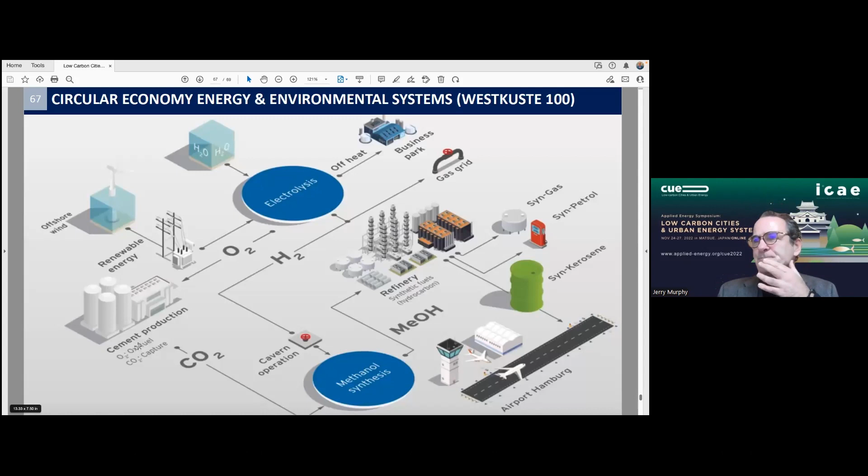So methanol will be the shipping fuel that will decarbonize shipping. And we reckon we need a drop-in fuel for planes. This is a concept I've borrowed from my colleagues in Germany. They have this idea of offshore wind in the North Sea with big electrolyzers. The oxygen goes to the cement factory to make a green cement. We capture the CO2 from the cement factory and react it with the hydrogen to make methanol. Methanol is converted to synthetic kerosene, and we have aviation fuel.

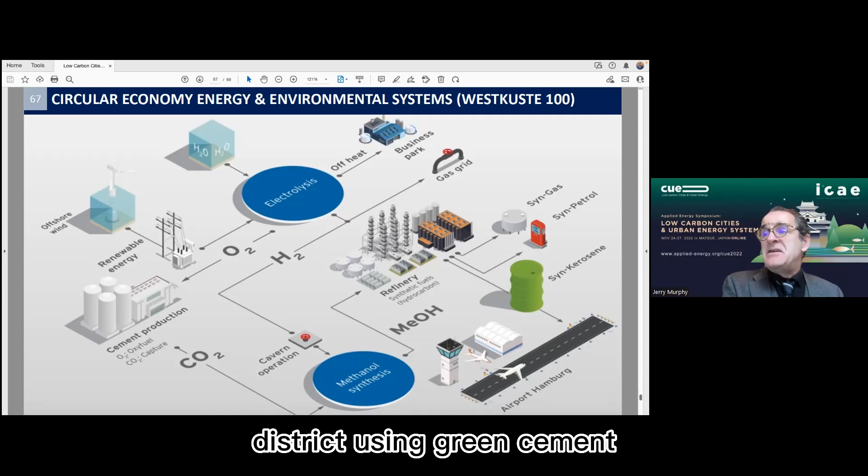So we're now looking at this circular economy system: offshore wind, electrolyzers, district heating, green cement, and sustainable aviation fuel. There's many, many ways of doing this. Again, this is our canvas, this is what we work in, and we're looking at the hard-to-abate sectors.

One thing we're working on at the moment, not yet published, is renewable fertilizer NH3 from offshore wind using the Haber-Bosch process. We can obviously decarbonize the production of fertilizer, but when fertilizer is put on the land, there will be nitrosomonas and nitrobacter, and they will make N2O. So even by decarbonizing the production of fertilizer, there will still be emissions from fertilizer on the land.

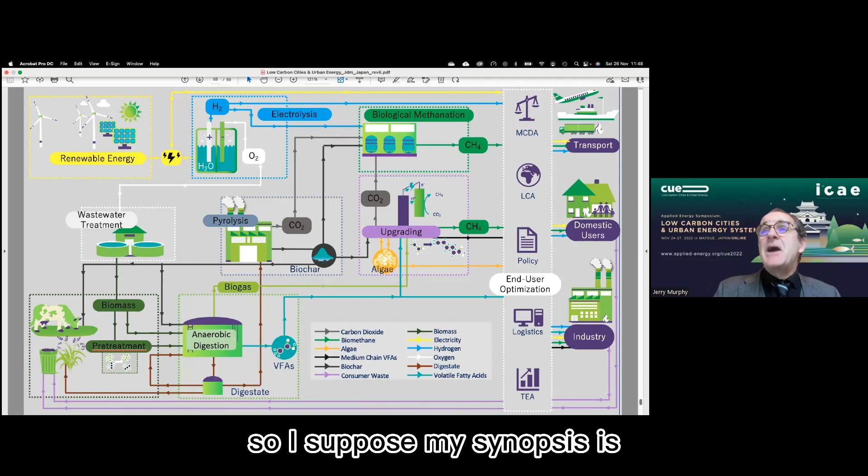So my synopsis is there's lots of things we can do, but getting to zero carbon is very, very challenging. A lot of my colleagues consider me a carbon junkie, always looking at carbon rather than electrification. I'm a huge fan of electrification - I have PV in my house, I have an electric car - but to get to zero carbon we're going to have to go to ammonia, methanol, power to X, anaerobic digestion.

We're going to have to treat our waste. We're going to have to look at circular economy systems. I think that's my presentation done. Thank you very much for listening to me.

Well, thank you, Professor Murphy. That's a very interesting and comprehensive introduction of your group's research. I think there's a lot of new knowledge I've learned, and I think the audience also needs to take some time to absorb it. So now we come to the Q&A section. Any questions from the audience? I guess I can use my privilege as a host, so I'll ask several questions first. Since I'm not an expert in these technologies, I'll just ask very broad questions.

So, Professor, have you ever estimated if all these technologies you introduced can be applied to, for example, Ireland? Have you ever estimated how much greenhouse gas emissions can be reduced? I suppose what we provide is a menu of options, and we're slow to be definite. We're very slow to say this is the solution, because it depends on air quality, environmental factors, cost, and greenhouse gas savings.

I suppose what we've found is that Ireland is a relatively small country. We have a population of 6 million. We have a huge resource, and our European neighbors - the Germans and the Dutch - are coming to us, and they want us to give them hydrogen so they can continue making fertilizer, ammonia, and methanol. Rotterdam wants Ireland to supply either electricity, hydrogen, or ammonia at a scale that would replace Russian natural gas.

I do think that energy security has trumped climate change. There is a crisis in Europe - we don't have natural gas to the extent that we did. How do we make ammonia? How do we make methanol? How do we make Mercedes? How do we make steel? I think Ireland is seen as a country that can provide lots of energy to Europe.